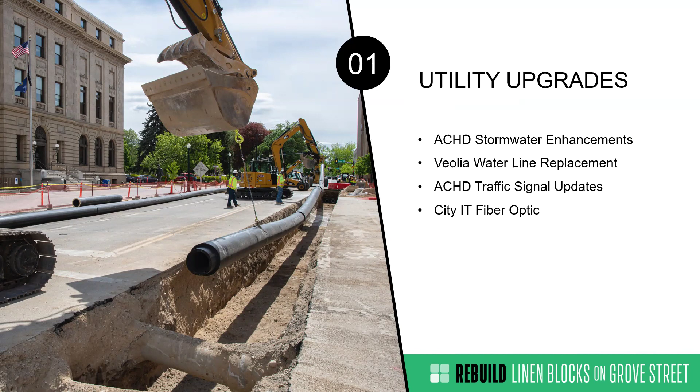The next aspect is the replacement of the aging roadway on behalf of ACHD, making for safer, smoother, and more comfortable travel for those visiting Grove Street. We've seen over the last couple of years that ACHD has been doing quite a bit of infrastructure improvement downtown. They just wrapped up the 9th Street improvements a couple blocks away. During early coordination with ACHD, they asked CCDC to do this road reconstruction on their behalf, so we brought that scope into this project.

We'll be peeling up the existing asphalt, installing new base aggregate, and reconstructing with concrete paving. You might be wondering why we're doing concrete paving. There are a couple key benefits, and heading into chip seal season right now, one is that concrete pavement doesn't need future maintenance, so you won't get that 5-year rotation of chip sealing or micro sealing. It'll be a sturdy, long-term product, meaning fewer disruptions in the future. Another benefit is that it's lighter in color, so some of that heat island effect is negated by the change to concrete.

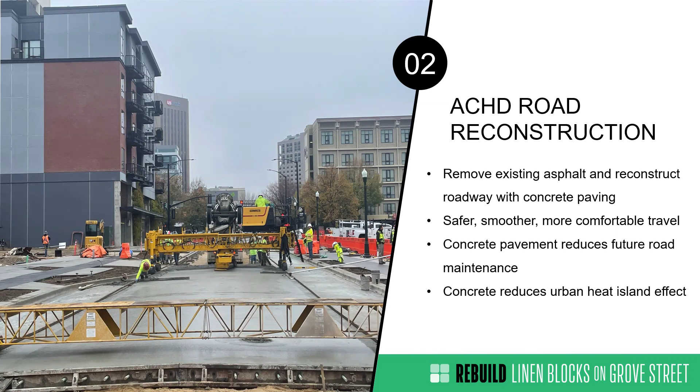The third element is that Grove Street is an essential link in the citywide bicycle network, providing a direct route between downtown Boise and neighborhoods to the north and west. During conversations with businesses and property owners in the visioning process, we heard over and over how much they valued on-street parking. So we listened and designed a street that works for all modes: vehicles traveling the corridor, bikes with a dedicated and protected bike lane, and pedestrians with accessible sidewalks. We balanced all of this while maintaining on-street parking in front of businesses and still having space for outdoor cafes on the sidewalk.

We'll be installing a raised bike lane as well as treatments to improve bike safety and comfort at intersections.

So once complete, cyclists of all ages and abilities will feel comfortable riding down Grove Street, and businesses will benefit from those customers being drawn to this new state-of-the-art bike facility. It's also an important linkage at Grove and 11th, intersecting the new 11th Street Bikeway that was recently completed, providing a direct connection from the Boise River to the south all the way up to Camel's Back Park to the north. We're already seeing new apartment buildings and hotels coming online, using that close proximity to those new facilities as an attractor when telling customers to visit or trying to lease up their buildings. So it's pretty cool.

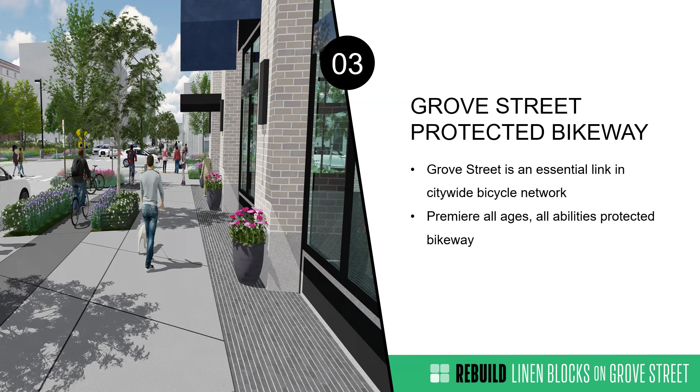The fourth one is the Streetscape Enhancements Project, a CCDC-led initiative identified back in 2019. There are portions of the sidewalk that haven't been previously enhanced, and the majority of the sidewalk on Grove Street just doesn't meet the city's standards for streetscapes and really needed improvements. We wanted to make sure we were providing amenities that supported people spending time in the street, so shading from street trees was important, along with more seating options, which isn't really present currently.

The project will use unique finishes and amenities to set itself apart and create a distinct identity. You might have noticed when walking down some of the completed sidewalk portions, we've done decorative scoring—special saw cuts unique to Grove Street meant to look like folded linen. This was one of the design team's ideas for the Linen District, giving it some unique style.

We also have specialty site furnishings such as pet rails that protect the native plantings you see being planted on these first couple of blocks, and concrete benches for seating—so a higher level of finishings than what you'll see in traditional streetscape projects. Additional amenities include bike racks, trash receptacles, and historic street lights.

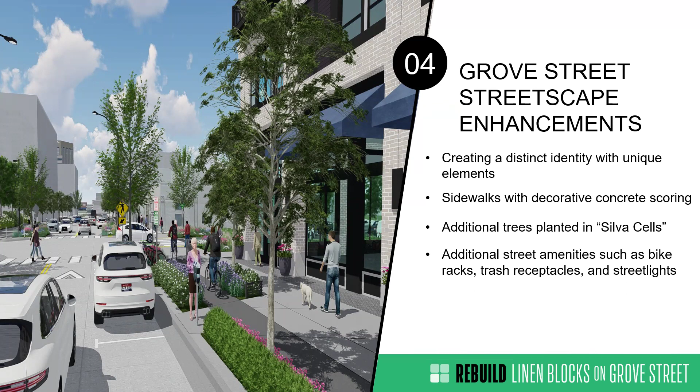One of the biggest things we heard during the visioning process was that there was a lack of activity after the workday ends—people would come downtown to work and then just peel out, not spending enough time in the businesses and establishments here. By making these improvements, the intent is to create space for people to want to visit and stay, rather than just walking through as they head to another destination. So it's important to plan for a mix of uses, including incorporating public art that acts as a draw to attract people to the area.

We have a couple of public art elements throughout the project, one of which is art ports—two elevated concrete pedestals that display rotating student sculpture art. Arts and History has been working with BSU's sculpture program, and the first sculpture is already complete; it will be installed in the coming months right in front of the Modern Hotel. The other art port is on the south side of the 9th to 10th block.

The project is also working with local nonprofit Signs of Our Times to restore and install six historic Boise neon signs. Those will go on the north side of Grove Street between 12th and 13th Streets, creating this historic Boise neon sign gallery.

The slide shows a rendering of that design concept. I'm going to try to show a 3D visualization, and if it doesn't work we'll just carry on to give you a sense of what that looks like. I don't know if it'll pop up, Lana. Is it going to? No, okay, we're going to fail on that then. Sometimes technology works, and I think we have.

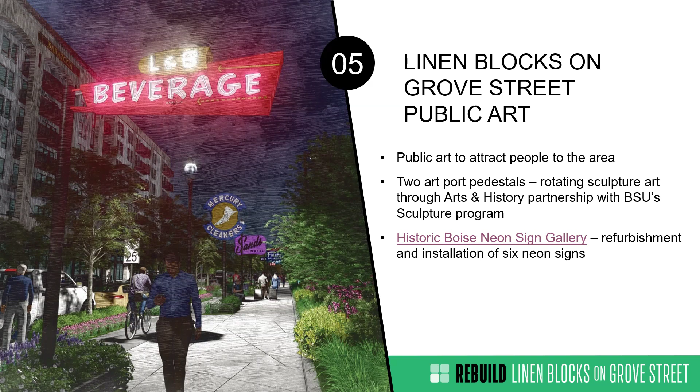So a lot has been accomplished since we started construction back in December '22. We've completed utility relocations and upgrades between 10th Street and 14th Street, which was the first phase that came close to your area. Streetscape and roadway improvements have been completed between 10th and 12th Streets, and 12th and 13th. The 12th and 13th intersections have been completely rebuilt, including new traffic signals installed at the 13th Street intersection. You're starting to see some of that planting and landscaping going in as of last week.

We're really looking forward to turning over Grove Street between 12th and 13th in June. And then the 13th to 14th Street block is reopening this week. So we've made a lot of progress. This is an overall map of the project.

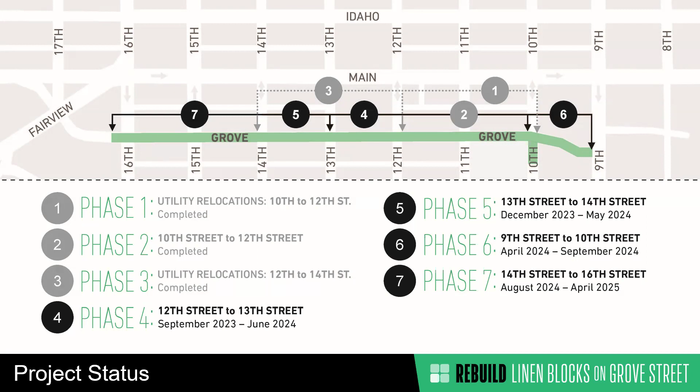This will be a good resource, I'll be sending out these slides and you can spend a bit more time on that. But I'm now going to turn it over to Anthony with GUHO, who will walk you through each sub phase of these next improvements so you can get a good understanding of what's going to happen when.

Thank you, Amy. So we've broken down the 14th to 16th stretch of Grove into 9 different phases. This is based on a lot of feedback from different businesses, past projects, and experience finding the right balance between tearing up a whole bunch and maximizing efficiencies from a construction standpoint, but also minimizing impacts to the businesses. There's a sweet spot balancing both of those constraints, and we feel this plan balances that well.

So phase 1 will start at the end of July. This will be the utility upgrades. First thing that will happen is our water main replacement. Like Amy said, Veolia currently has a water line that's at the end of its life, so Veolia is coming in and updating that to new standards, upsizing it for some of the new uses on the block. So they'll come in and replace that.

Then once the water line is out of the way, we're also upgrading the storm drain. Currently the storm drain line is right between the road and the sidewalk, so it gets relocated out into the road. That allows for the double row of trees that Amy was talking about, in the silva cells.

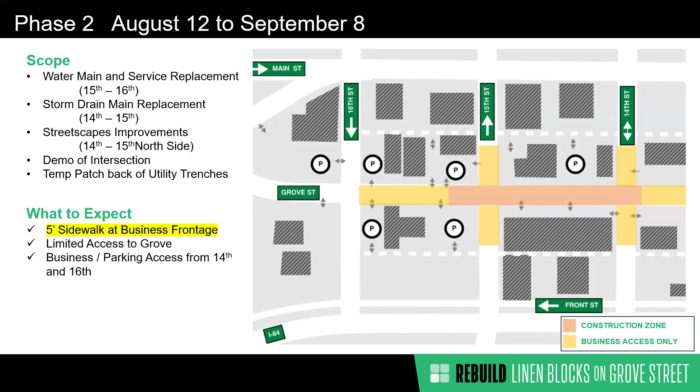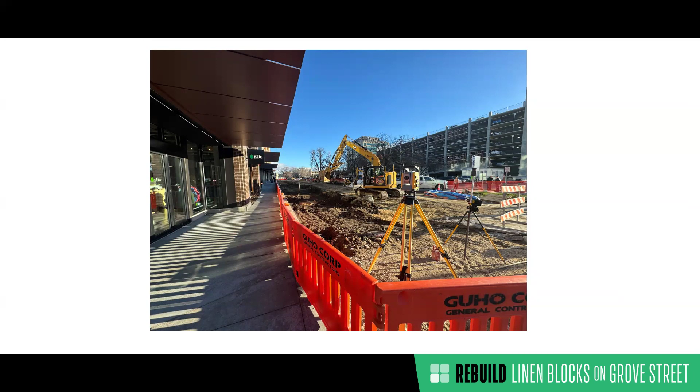This is a picture from a few months back on Grove between 6th and 5th that shows a similar approach to what you'll expect to see when we do the streetscapes 14th to 16th. You can see here the sidewalk and then the work happening with the fencing delineating the project in the public.

Phase 3 of the project will take place from September 9th to September 22nd. Once we get 15th Street done, then we jump and close 16th Street to continue the utility installation through 16th. During this time, we have one lane of 15th Street open, which will help with driving some of the traffic and keeping things accessible. Similar to 15th, once the utilities are done on 16th, we'll patch that back so we can open it up to traffic.

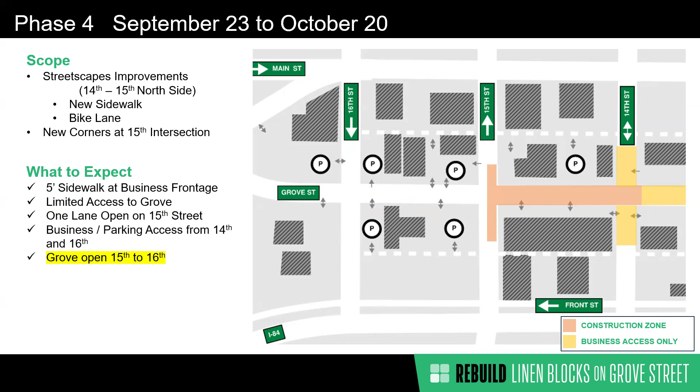Phase 5 will take place October 21st through the 27th of November. Back in phase 4, we'll be working on the corners of the 15th Street intersection. Then in phase 5, during this closure of 15th Street, is when we're actually repaving the intersection. What we've done here is adjusted our approach to open 15th up for a couple weeks in the middle to allow traffic there versus just having it closed the entire time.

During this time, 16th Street will be fully open and minimal work will be taking place 15th to 16th. Business access will be available off of 16th for Grove between 15th and 16th. Our goal is to have from 15th to 14th complete by Thanksgiving.

Brings us to phase 6. Between Thanksgiving and New Year's, what we're shooting for is that 15th to 14th is complete, and then we're not starting or continuing work 15th to 16th over the holidays to help, knowing that a lot of your busy time is during the holidays, so minimizing our impact during that time to help out the businesses.

Phase 7 will start after the first of the year, and this will run through February 9th. This will be streetscape improvements from 15th to 16th, happening with business access available coming off of 16th for limited parking lot access. But this will be streetscape improvements on those block faces.

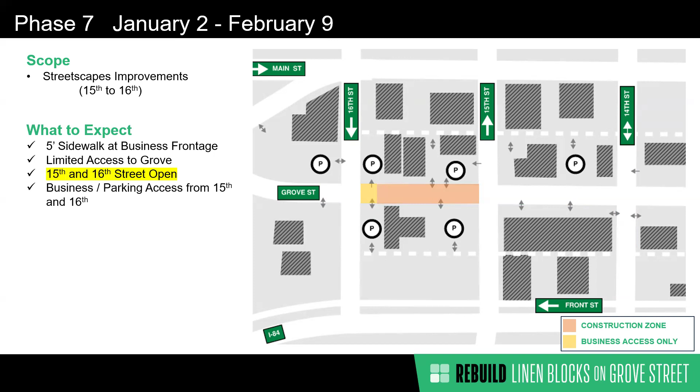Then phase 8, which will take place February 10th through March 31st. This is when we'll start rebuilding the 16th Street intersection. This will be similar to 15th Street. We'll choke 16th down to one lane and do the corners and get that work done in preparation for the paving.

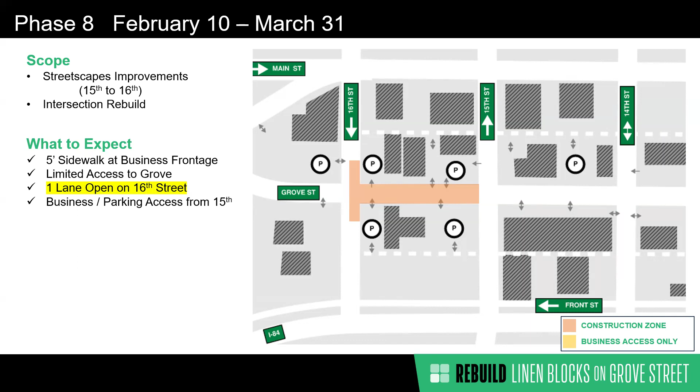And then lastly, our last phase will be our concrete paving of the intersection. This will close 16th Street during the month of April. At this time, we'll do the concrete paving and are shooting to be complete by April 30th.

So a few high-level things to expect during construction. Generally speaking, our working hours are 7 a.m. to 6 p.m. Monday through Friday. We try not to work the weekends, knowing there's a lot of weekend traffic and increased business activity on the weekends. So we're not working Saturdays. There may be some night work at the beginning and end of the project with Veolia, back to those water services.

If it's advantageous for a business to have their water shut down at night versus during business hours, they'll do that at night. And then when we go and do our concrete paving on some of the larger pours, there may be some early morning pours where just the volume of trucks delivering the concrete, it's a lot more efficient to do that, where we might start at like 5 a.m. But generally speaking, 7 to 6 is when we're working.

Business access, we'll maintain that during all times. So the sidewalk in front of your business, you're not going to be blocked off where you don't have access. The couple days when we're directly pouring the sidewalk in front where the actual door is at, we'll coordinate with you ahead of time and figure out a schedule for how that least impacts you, but that should only be a couple day turnaround on that.

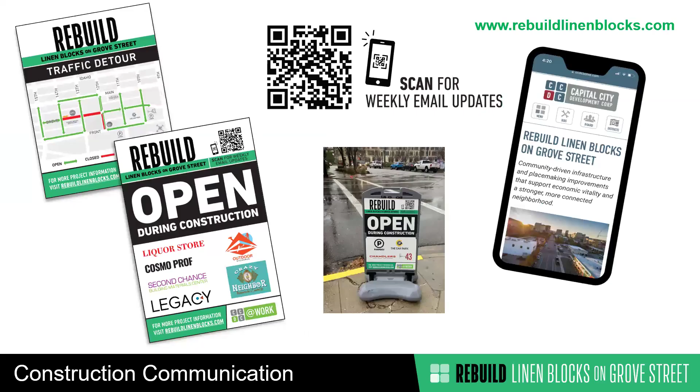Okay, thank you. So I know that was a lot, and we'll have time at the end for questions. I just want to talk quickly through some of the communication support we're able to offer through CCDC and also in partnership with the DBA. It is a priority for us to maintain easy access to your businesses, in addition to what Anthony shared on GUHO's side of the fencing and the communication support, checking in with all of you.

We will have clear signage in the form of pedestrian and bike specific detour maps, as well as other signs letting people know how to navigate to your business directly. We also have regular project updates that get sent out via email showcasing what's coming up in the next phase of closures and what to expect, so you know ahead of time. That same information is also posted on our website, so if your customers or residents are looking for how to get to your business, they have an easy way to access that.

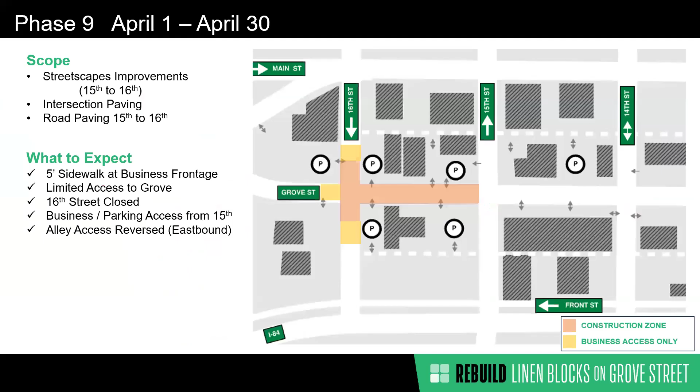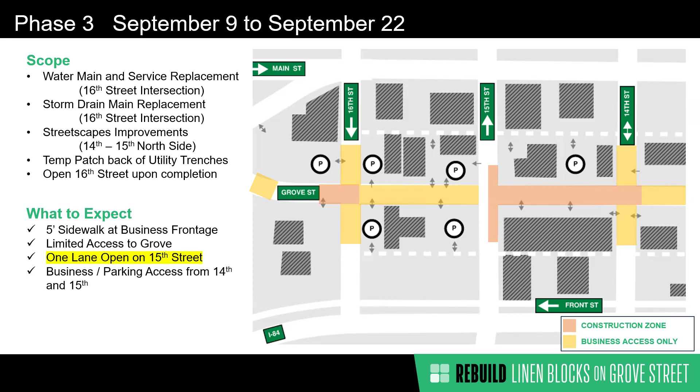Business access will be maintained during that time. We're going to phase it so the parking lot can exit either towards 14th or 15th, and we're breaking our phasing between the two parking lot drive approaches on Grove. So from that perspective, there's not a full shutdown. Okay, but work will be going on from 14th to 15th, from July 29th through Thanksgiving.

So what he's asking is about the actual road. You're saying there's going to be access, that's the 5 feet of sidewalk, but the road's going to be closed July 29th through Thanksgiving at our lot. The road will be closed to through traffic, and local traffic will be able to enter off of 14th Street, park in the parking lot, and then exit one of the two drive approaches. Okay, but the road itself, we're talking about just the road, not the parking. The road, so July 29th through what? Thanksgiving.

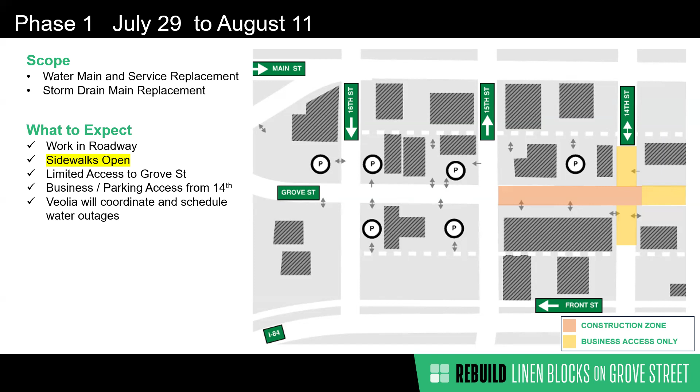And then you mentioned you'll take a break for the holidays, but it seemed like the bulk of the work picks back up between 15th and 16th. Will you be coming back at all to 14th, or will it be done by Thanksgiving? We're shooting for it to be done. We might, depending on weather and when winter shows up, have the plantings come back in the spring, but our hope is to get the majority of everything done by Thanksgiving.

In that parking lot that they can access, will they have an access and an exit, or just an access? We're doing our best to maintain the 14th Street entrance and one of the two Grove Street exits, because it's very narrow, so it'd be very hard to put a car in there, turn around and go back the same way, while another car is coming in. So that would be an impossibility. Yeah, and that's part of those longer durations, factoring the parking lot access in.

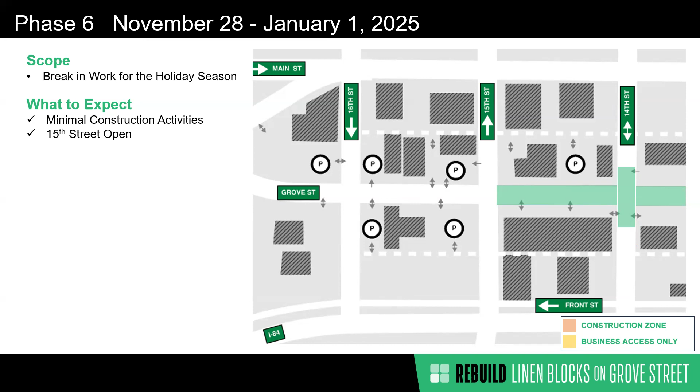It would be a lot quicker to just close Grove Street and block off those exits, but that wouldn't work for all those businesses. That's why the duration is longer, factoring that in and phasing it so we're maintaining where cars can exit the parking lot on Grove and go east or west during the different phases. So you're maintaining one-way traffic through that parking lot, basically, coming in only on 14th, like it is now. Yes, primarily you'll come in off 14th and exit going east back towards 14th. Then once the intersection gets paved on 15th, you'll exit and go out towards 15th, and we'll pave the section from the drive approach to 14th Street during that time.

So are you saying that at one period of time you will reverse the traffic flow, or is it always going to be from east to west? Traffic flow is not gonna be reversed. You'll be primarily going west to east on when you exit. Parking lot will always stay coming in off of 14th and exiting off of Grove, 15th side.

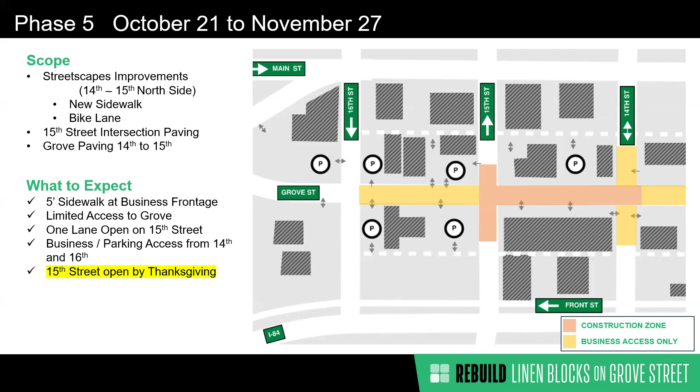Are you currently on schedule with the other phases that you've done? Have you been able to meet those schedules? And are there any LDs on this portion of the project?

We have LDs in our contract. What has been challenging on the phases we're currently under construction is the amount of private development we're interfacing with, and so schedules have slipped in coordination with those projects. On these two blocks, there's no private developments we're coordinating with, so it's a lot simpler to plan. Well, I won't say simple because there's 9 subphases, but yeah, there's less outside impacts besides weather.

Is there an opportunity to put a walking bridge during that construction time between the north and south sides? Currently there's a lot of traffic that goes from business to business in that area on both sides of the street. Is there an opportunity to put a walking bridge so they don't have to go all the way down to the corners and cross over? We can explore that. That might be a challenge with all the construction equipment traversing across that, but we can explore that option.